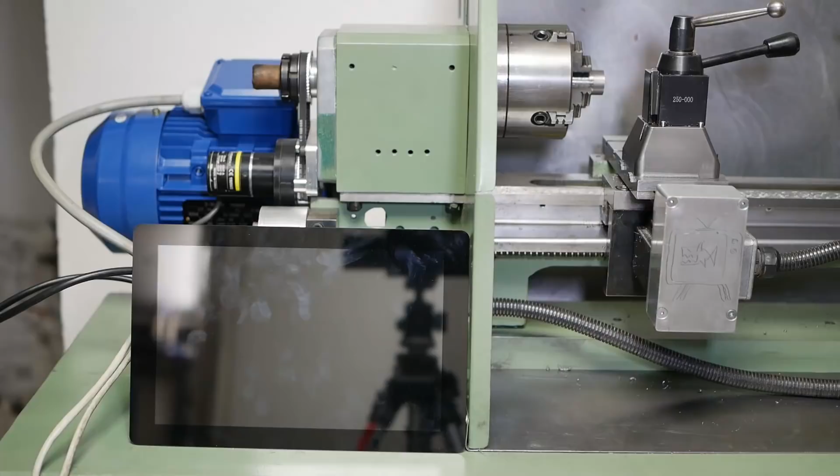Now, as I mentioned last week, it's about time I did something with this monitor and made a sort of user interface module and put in some sort of a housing around this area. So that's what we're going to get into.

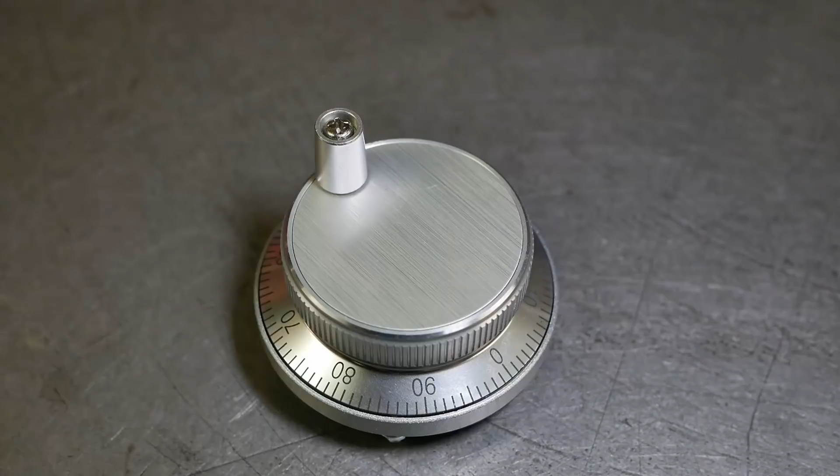I'm going to use this jog wheel, which I got off eBay. These are pretty cheap, they only cost about 15 bucks. Seem pretty nicely made. Of course, to go with the jog wheel, I also need two switches. I need one switch with two positions to select between the X-axis and the Z-axis.

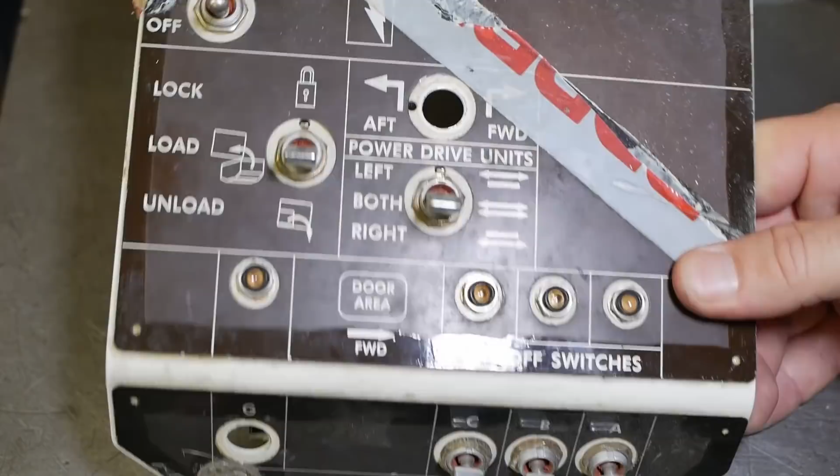You know, about two decades ago when I worked in aircraft maintenance, I fished this out of the rubbish bin at work. It's the cargo loading panel, and it's followed me around for the last 20 years. Came from a Boeing 767. I'm pretty sure it was a service bulletin. For whatever reason, this would have been replaced with a safer, better, whatever panel.

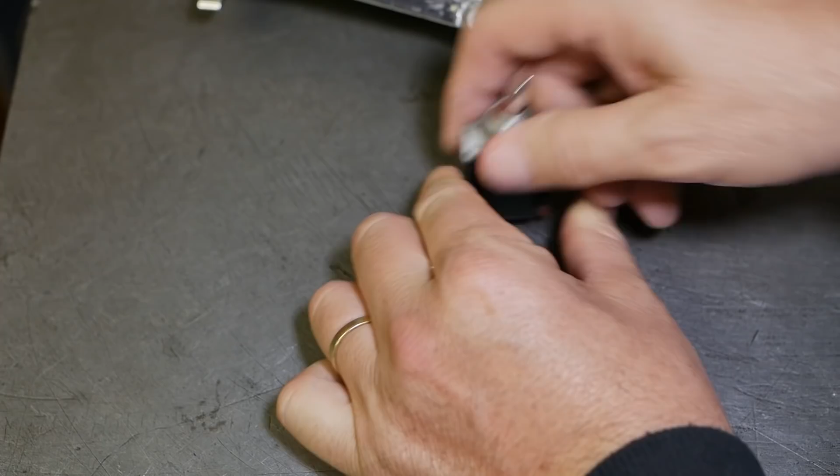Has these beautiful switches, nicely sealed, potted, very high quality, and they've got these funky sort of paddles on them, which I kind of like, so I'll use those. So this one is perfect for X-axis, Z-axis selecting. And one of these ones will be perfect for selecting between the three increment settings.

Many of the others are just momentaries. You have to hold them, so that doesn't really help me. I think that one's a momentary as well. Up here there's also a nice on-off and a second through position.

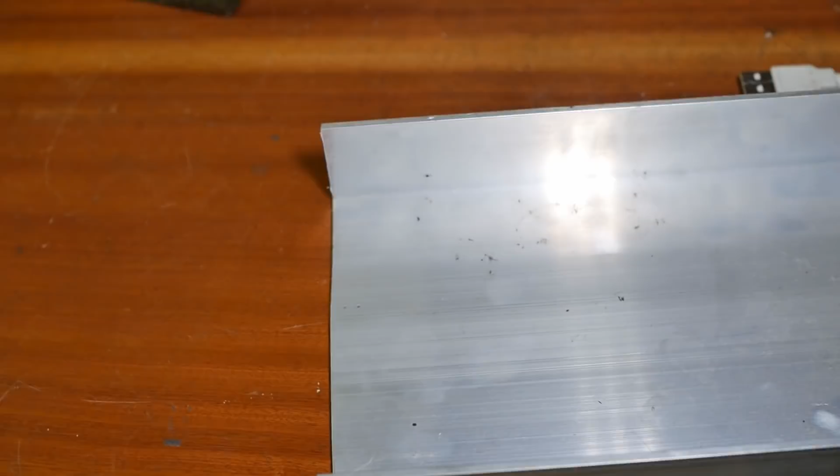I've got this aluminium U-section extrusion, so I think I'll make the actual keyboard mounting plate out of that. It's probably about 3mm thick, so it's nice and rigid. So I've just been working through the layout of everything and seeing where I need to drill holes. Probably going to look something like this.

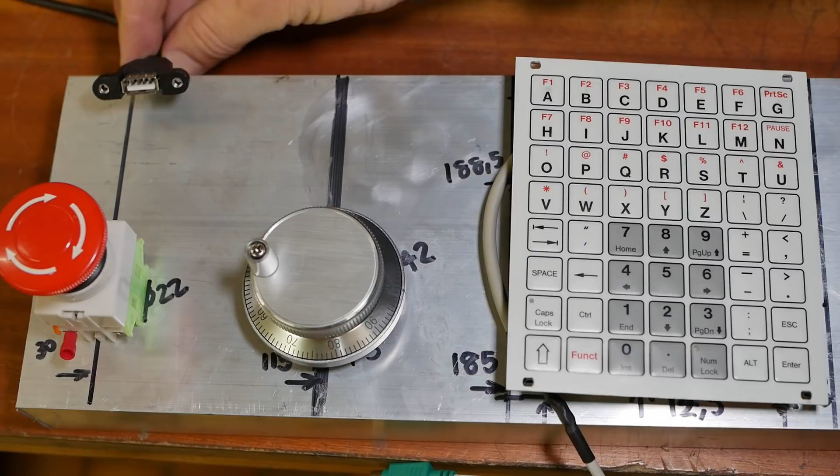There's going to be this USB hub here to put a thumb drive into, and I need the two switches to go here. I'm kind of going for a bit of a retro look, I guess. For those of you who like guitar amps, you know, sort of a Fender silver-faced, something of that sort of era.

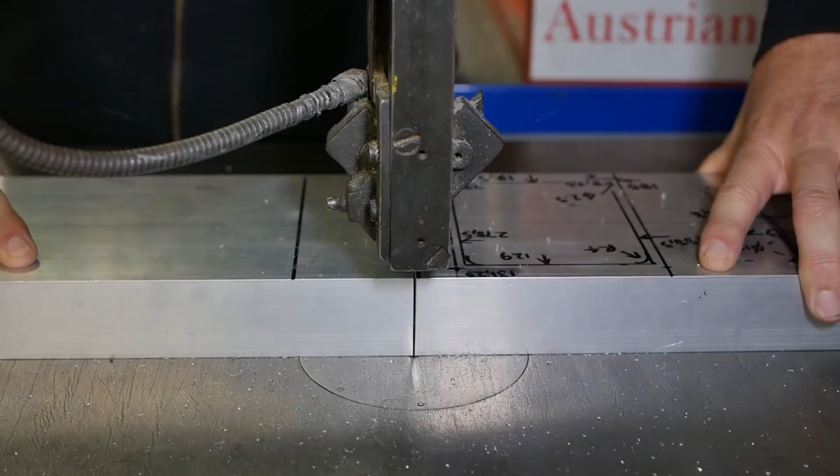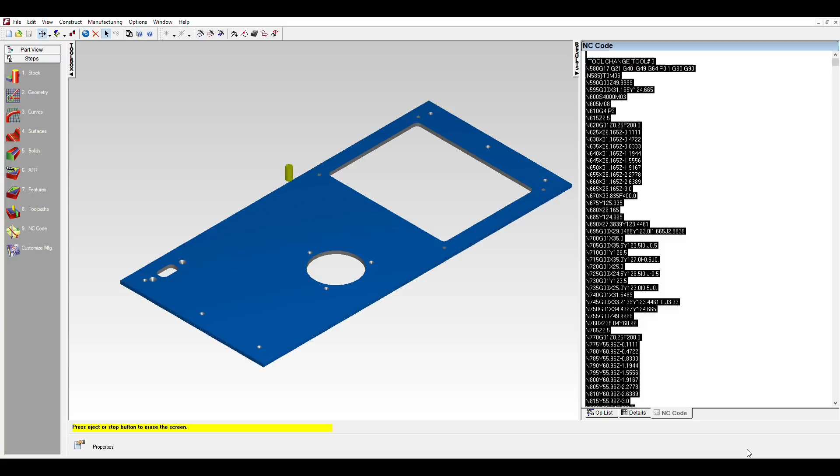And there we have it, the finished design, if you can call it that. A bit messy, but it will get milled off anyway. Well, I think I've now got this modelled in FeatureCAM. I'll just go through and check the toolpath. It's going to be 5 tool changes. I've got a spotting drill, 3.2mm drill, 2.5mm tapping drill for M3, 5mm end mill, and then my drag engraver.

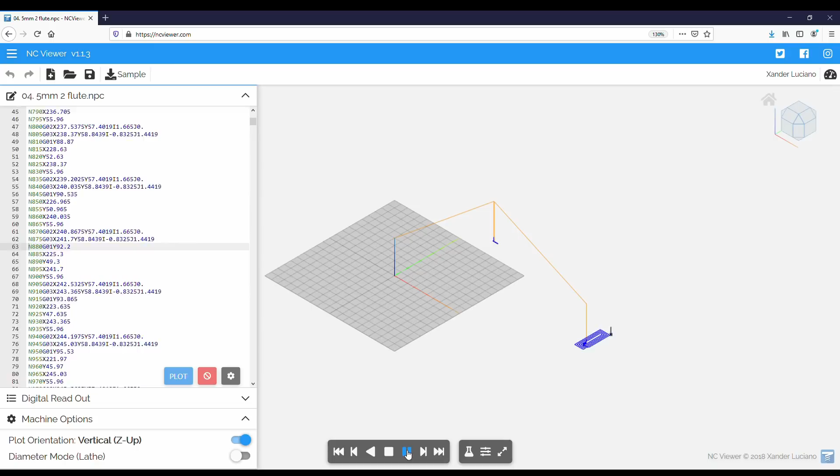Although Fusion has a back plotter, as does LinuxCNC, I do like to backplot each of my toolpaths here in NC Viewer, which is just a free web-based online program. Just gives me a little more confidence.

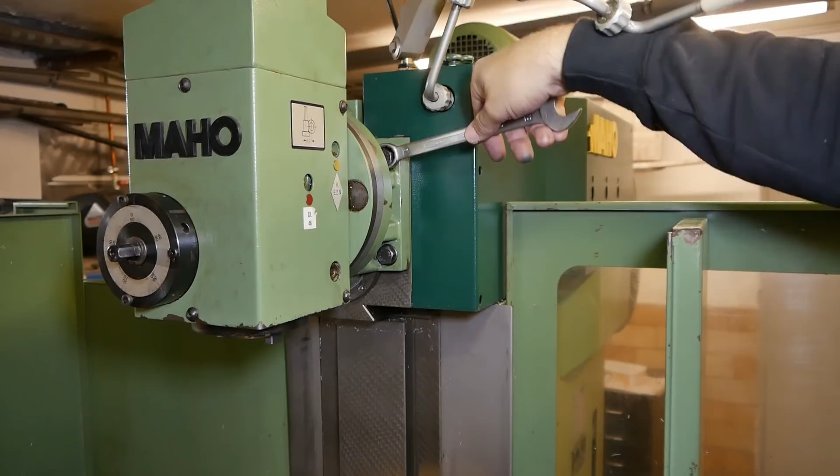It's quite lucky that this extrusion actually fits down between the T-slots. So I'll pack it up like that. First clamp the two ends, drill all the holes, and then I'll have to swap the clamps around.

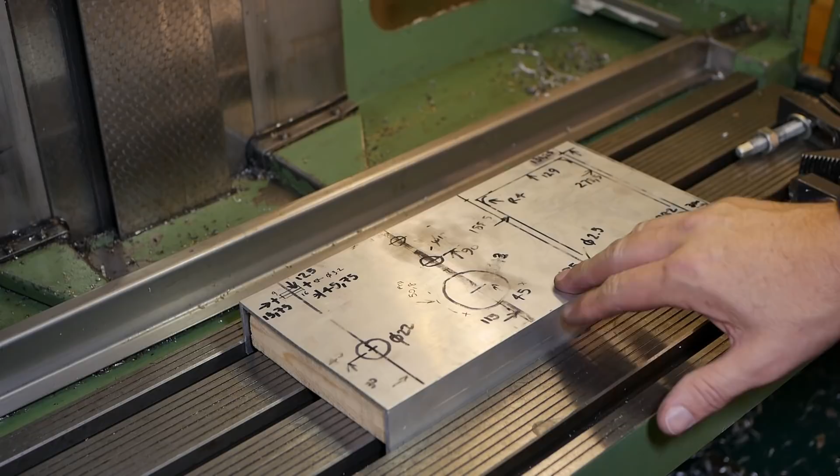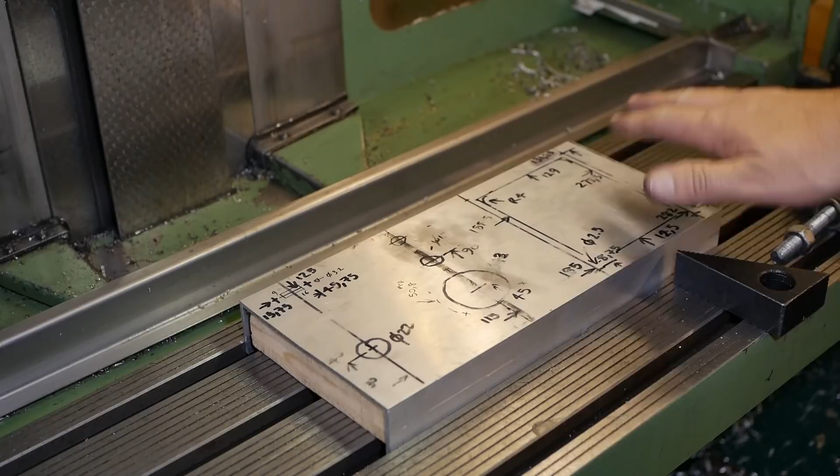Now on this job, I'm not really too worried about the perfect flatness of this top surface, in the sense that all of the holes are through holes, all of the cutouts are through cutouts, and I'll be engraving with my drag engraver, which is spring loaded, so as long as I can get this level within probably a millimetre, it's really not going to make much difference.

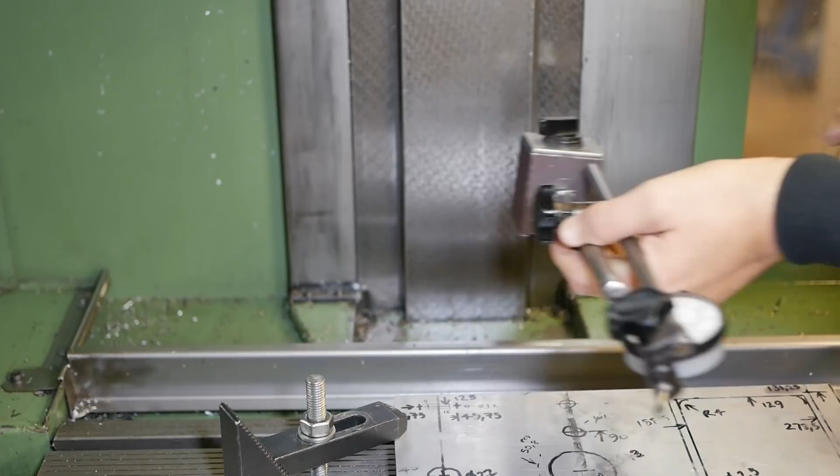There's a hole here and a hole about here, so I just have to be careful to check that out once I've got it nailed down. Wow, that's basically perfect without any adjustment. Next up, I'm just going to probe the top surface a bit and see just how far off flat this thing is.

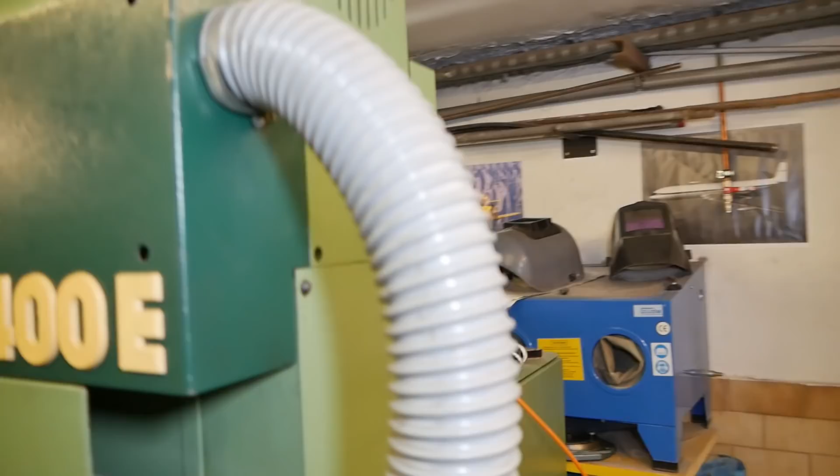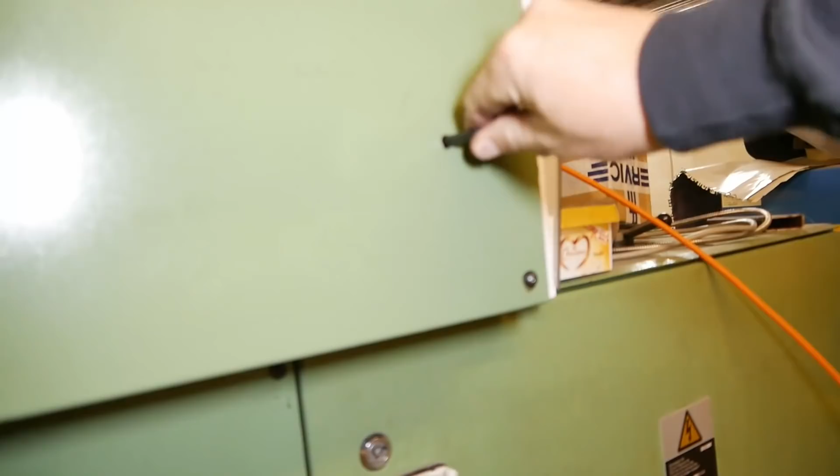Okay, I've just gone off onto a hard e-stop. That's unusual. It should have soft stopped before it got to that position. If that's going to happen, a hard stop, Y-axis is the best axis for it to actually occur in, because MAHO put a hex screw on the end of the motor. You can wind the machine back off its stop. And I can restart the machine.

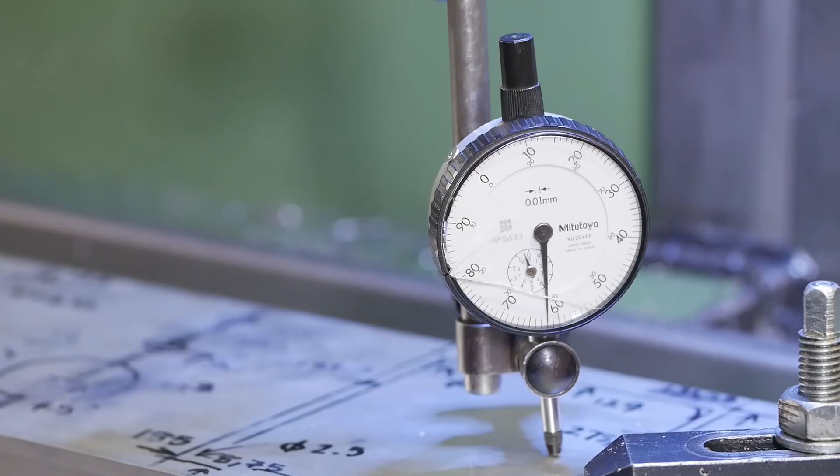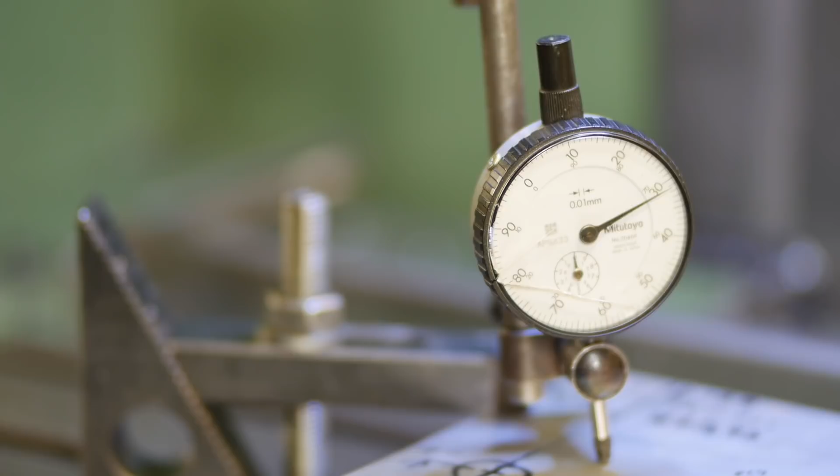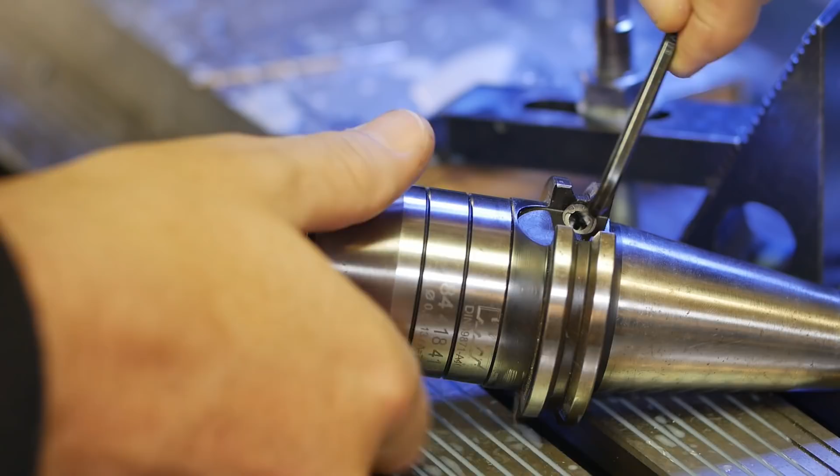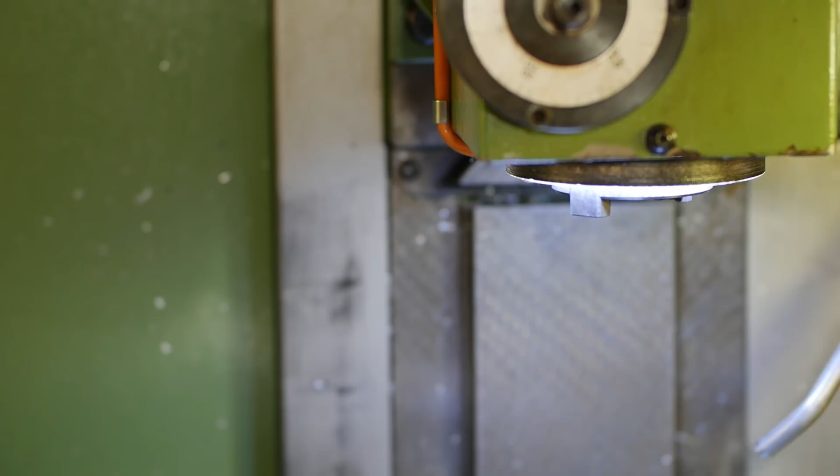Oops, that's too far. As you can see, it's about 0.5 millimetre out of level, but for drilling holes, that'll be fine. So first up, we're just going to spot drill all of the holes. Next up, we're drilling the 2.5mm holes. And now the 3.2mm holes.

Well, no one would accuse that toolpath of being efficient. It went all over the show. Now the fixturing is going to be a little bit awkward for the next bit, but I'll put a few screws in to hold the aluminium down onto the board well.

Actually, I'll try to use this one. So I'll take that out and use one further away. Now the next part is cutting out all the holes and the big pocket and trimming the ends.

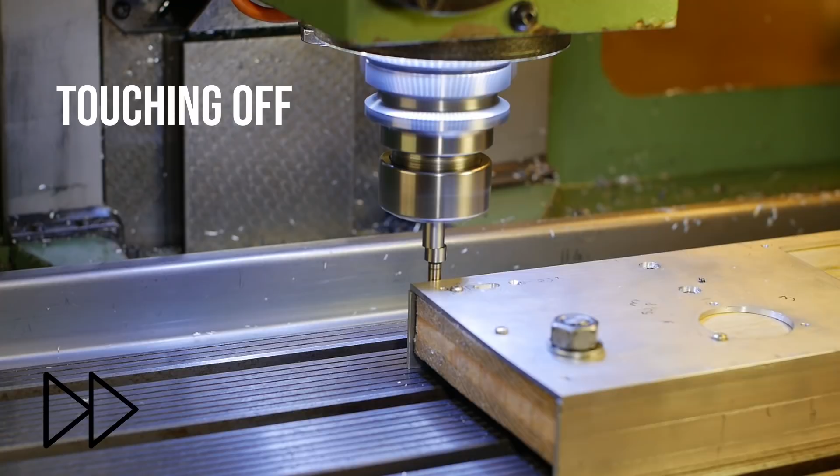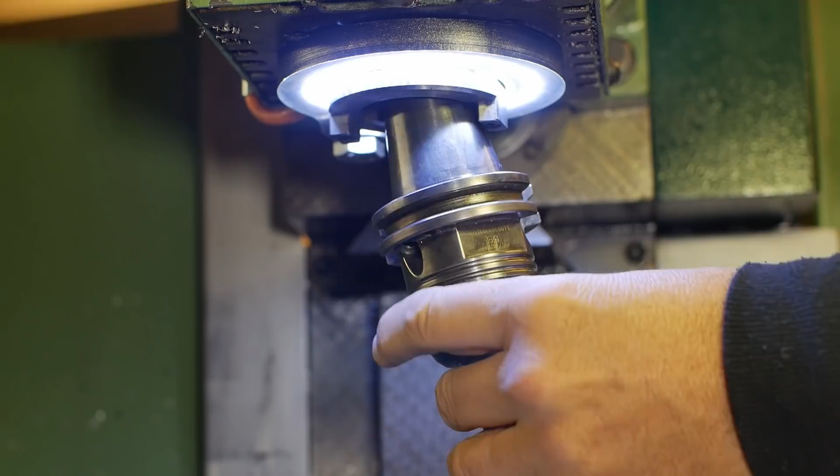This is my homemade drag engraver. The tip is made out of carbide, just an old end mill shank ground to a 45-degree angle, and it's spring loaded. Now I'm just going to touch this off.

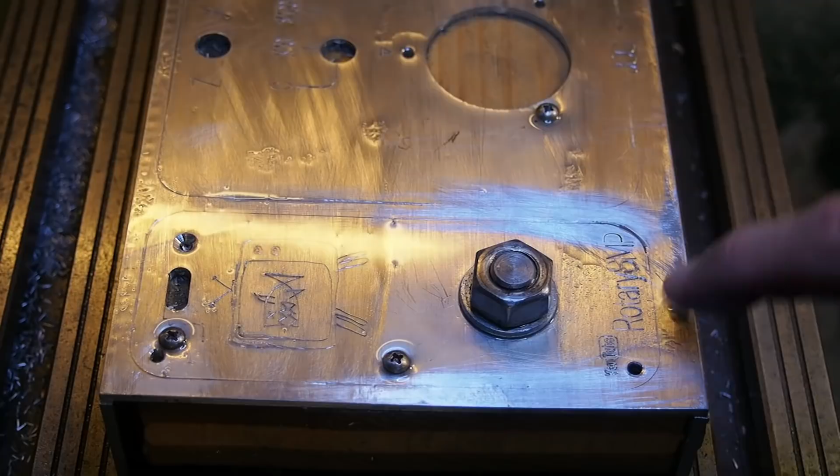The drag engraver unfortunately didn't cut that evenly in this very soft extruded aluminium. I probably also should have put some WD-40 on there first as a lubricant. So I'm going to run the toolpath again, this time with some WD-40 on it.

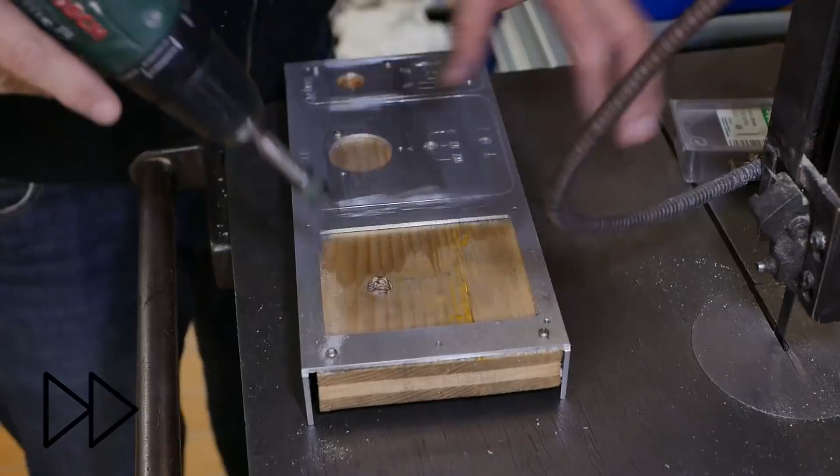Yeah, drag engraving's really not as nice as rotary engraving. As long as I've only got the standard spindle on the MAHO, which only turns at 4,000 RPM, that's really too slow for rotary engraving. I mean, I have done a little bit with it, but it just takes forever.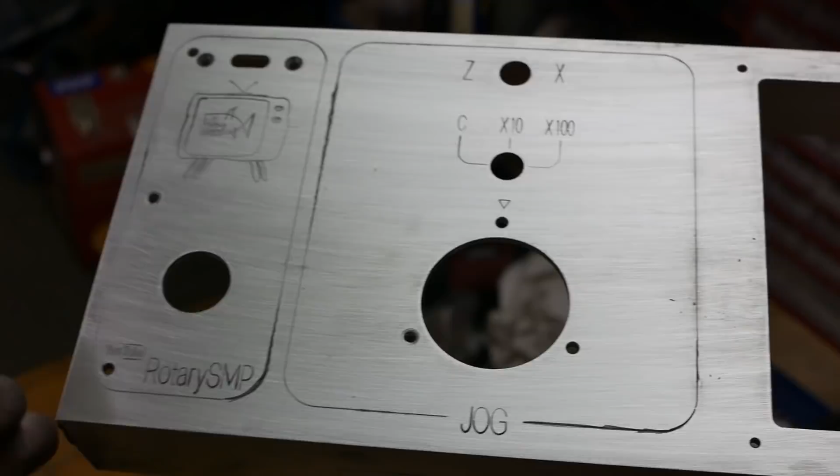Well, there it is. As I say, it's not perfect, but seems pretty legible, and yeah, I'm quite happy with that. It's kind of cool.

Whoops, I just realised I forgot to turn my microphone on. Oh well, all it was was just tapping holes.

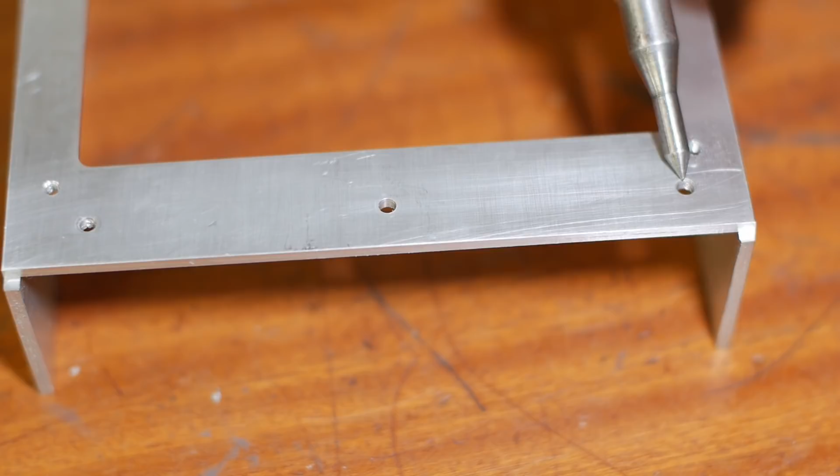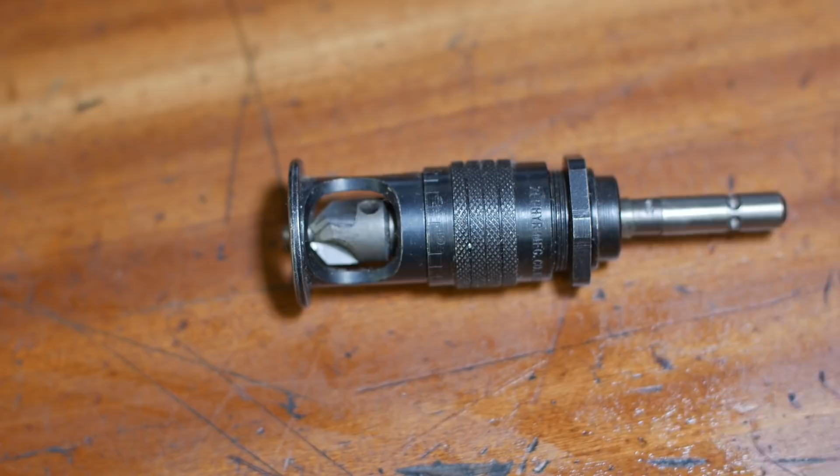The 3 holes on each end are going to be used to rivet a piece of angle aluminium too, and I want to countersink those for aircraft rivets. Did I ever show these before? These are microstop countersinks. I got this from Boeing Surplus up in Seattle.

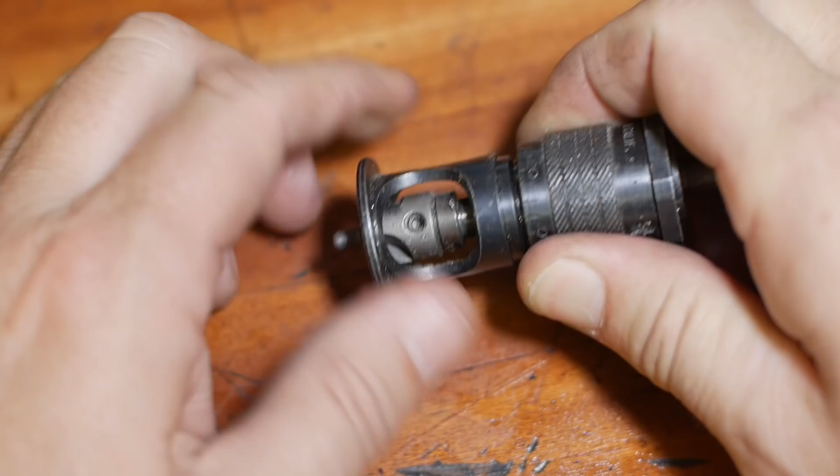They're kind of cool. They have a left-hand thread down the bottom here, and then a collar that's spring-loaded, and inside there's kind of a spline, so you can adjust the thing and then lock it. And then out the front here, the actual countersink itself, which is 100 degrees with aircraft rivets, is replaceable. It's got carbide inserts. Just a really cool piece of equipment.

You know, you set it up for exactly the right depth of cutting. You can do thousands and thousands of holes without having to reset it. They had a huge bin full of them. Don't know what's wrong with them. I can see nothing. So I bought 4 or 5 of them in all different sizes.

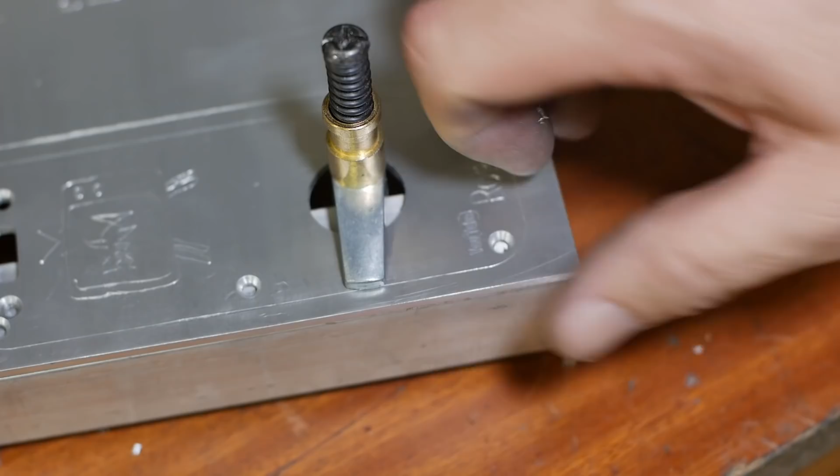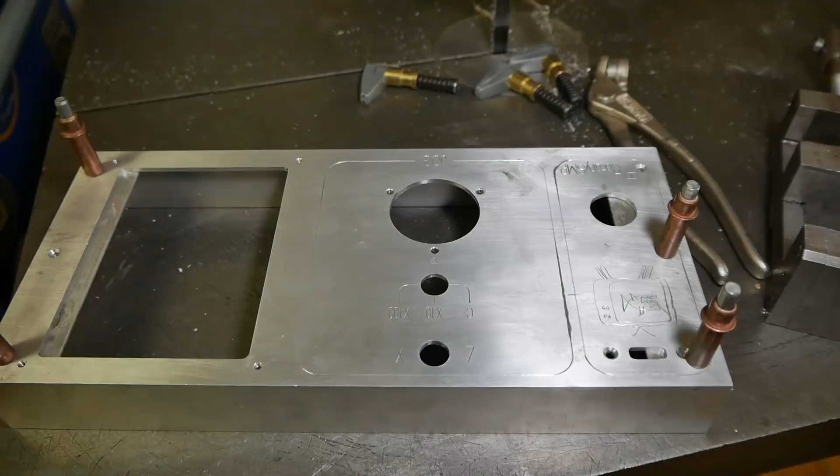Well, these flanges are a bit long, so I need to trim them down on both sides. Obviously I've got an issue with the edge distance on this top right hole. Yeah, luckily it's not structural, otherwise I'd have to do it over again.

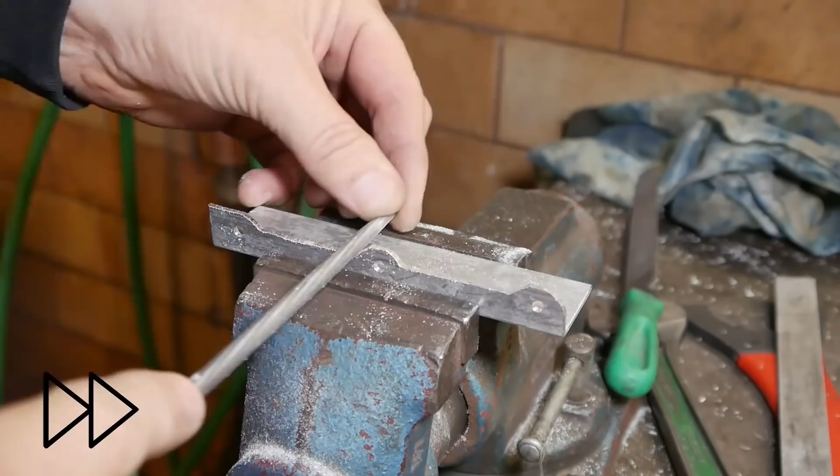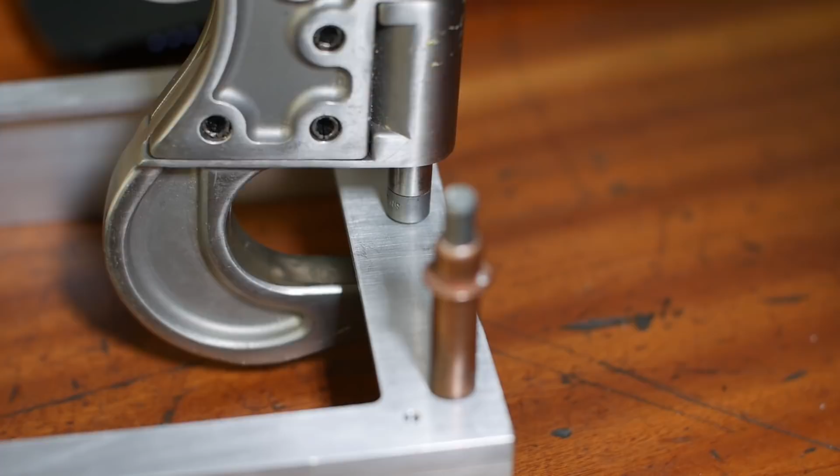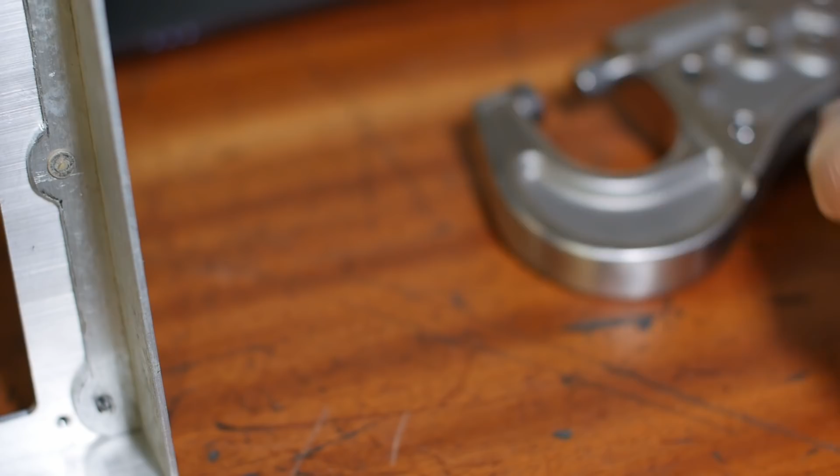Alright, let's nail this together, shall we? These are AN 426 aircraft rivets. Using my rivet squeezers. Whoops, that's a bit too flat for an aircraft job, that one. Over squeezed that a bit, so I'll just adjust the squeezer back. But it's a super fast and effective way of joining metal.

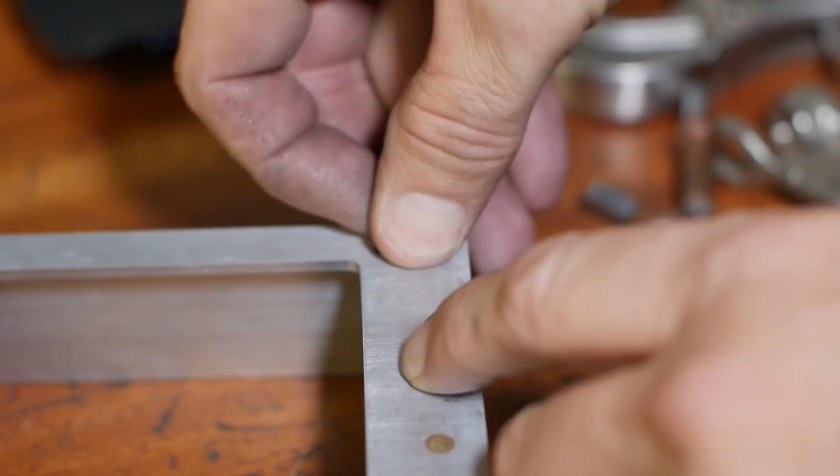Well, the first countersink, I think I might have got that slightly too deep. In fact, I did get it slightly too deep. Oh well. Lucky we don't have to fly with this thing. And there you go. There's one end done.

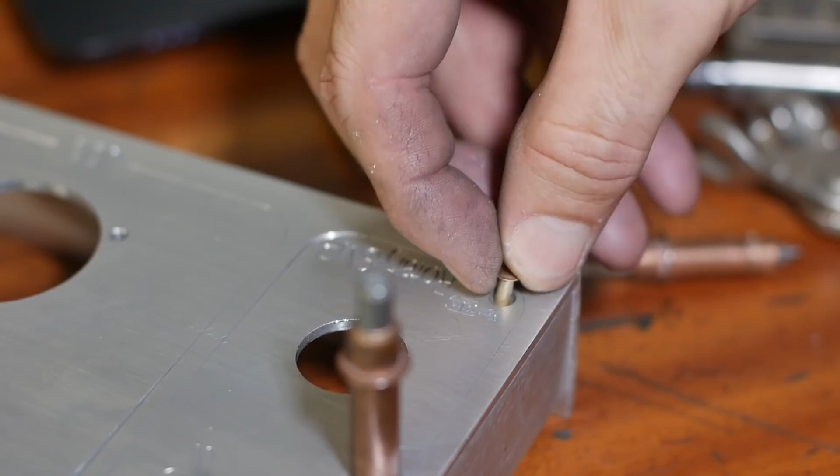Now I don't think I can squeeze this side. This is a piece of steel which I got from the scrap yards and I surfaced with the mill, so it's pretty decently flat. I'll just flip this over and we just drive that from the back. Called back riveting.

That'll do it. This next corner still wants to spring up a little. So what I'm doing here is just spreading the rivet a bit and then drawing the skin down, try and close up that gap. This looks good.

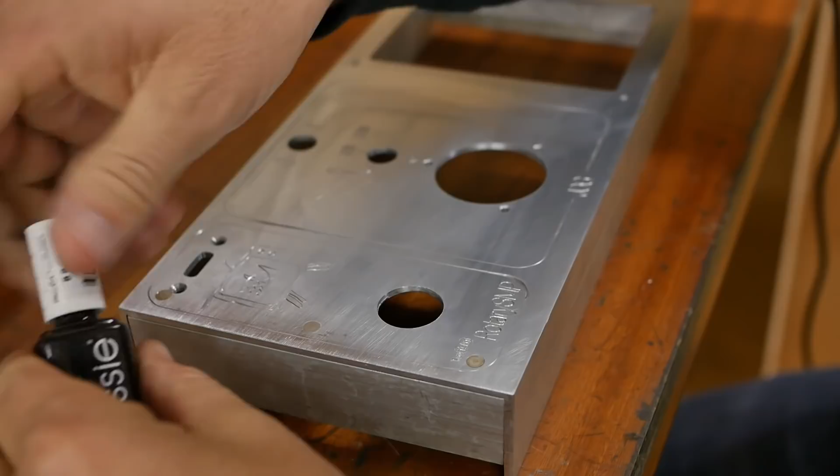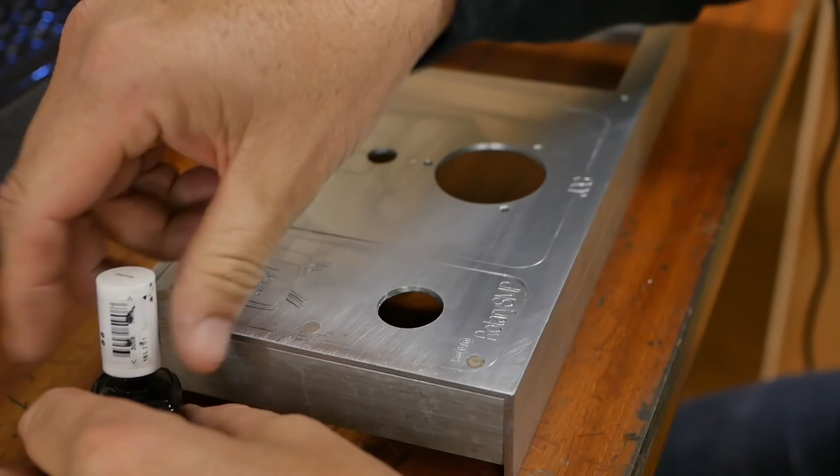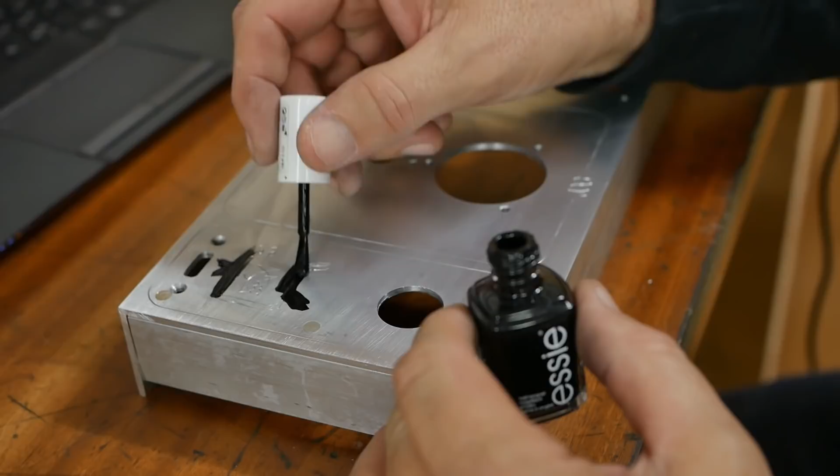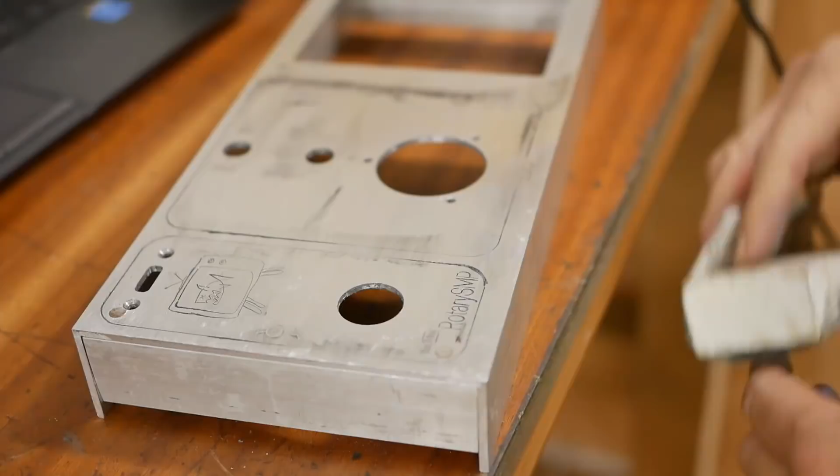So next up, using some nail polish, I'll just fill in all our engravings. See which one of these is thicker. I was given instructions to use the thicker one. Nail polish isn't really one of my big skills. It's a bit of a shame that that drag engraver tore out metal so badly in a couple of positions there.

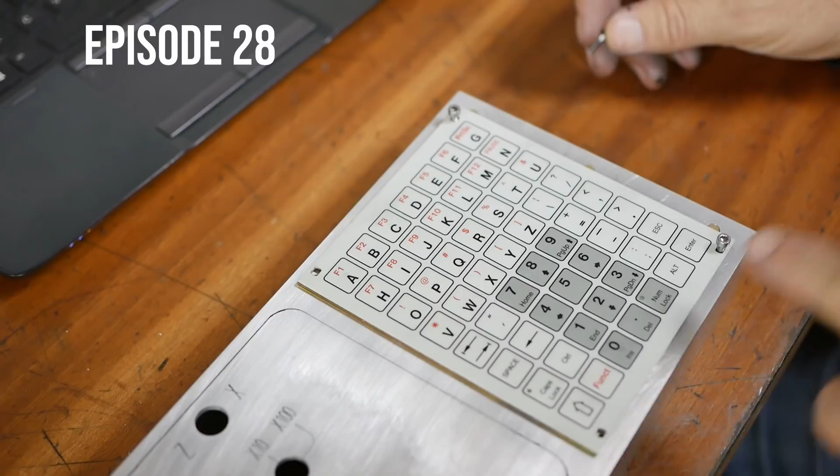Well, I think it's about time we start assembly, huh? First up, this keyboard, I've had a number of people ask about it. I found it used on eBay Kleinanzeigen in Germany, which is kind of like Craigslist for Germans. Model is the PC Mini 5, and it's made by the company Kundisch. I mean, I'm guessing it's probably ancient. One of the videos I did, I showed how I butchered the cable for this to be able to use it with a modern USB adapter.

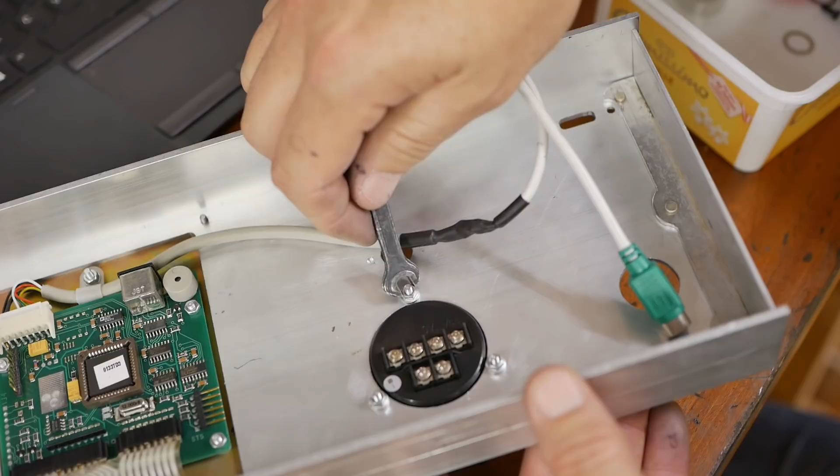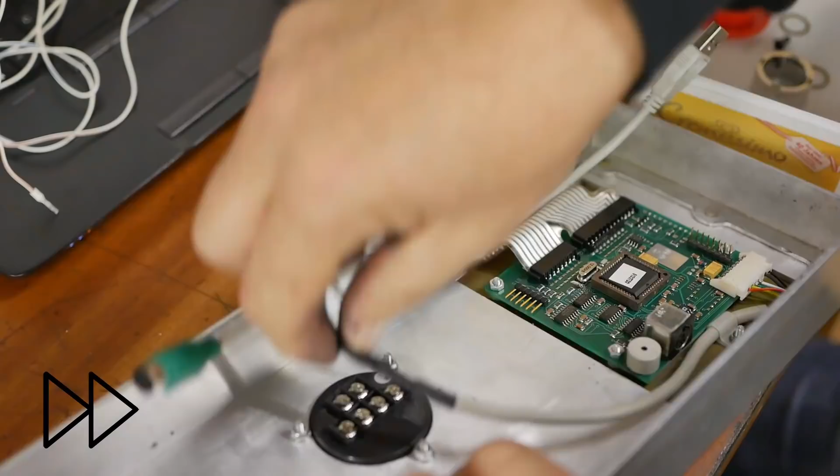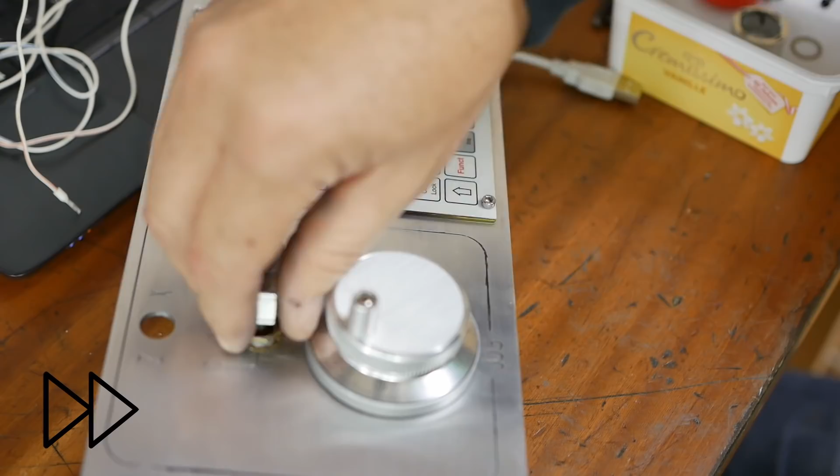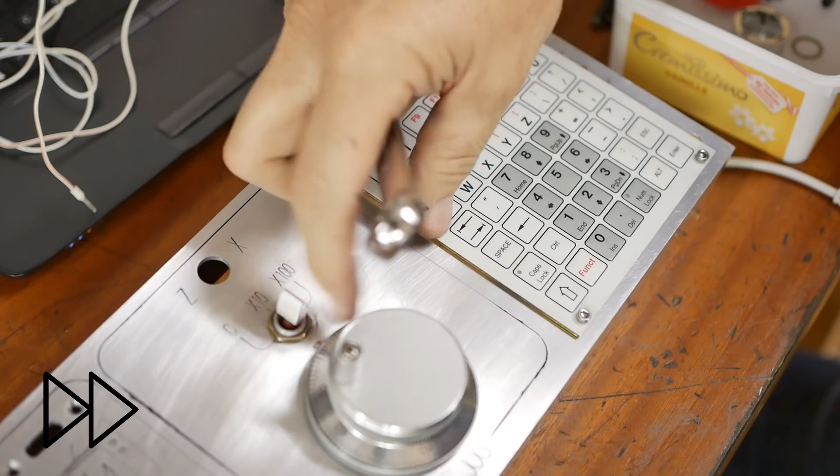Next up, we've got the encoder. You go looking on eBay for, I think, jog encoder or something like that was the search. You find these, they were about 15 bucks. Nothing special. Those are very satisfying switches, very nice.

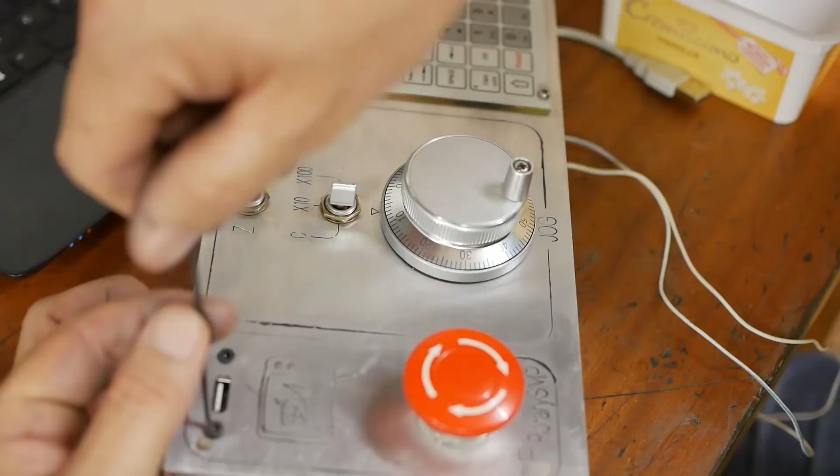Well, there we have it. That's the finished control module. Now I just need to install it, wire it all up, and get all of these things configured. But I think that'll be a task for next week.